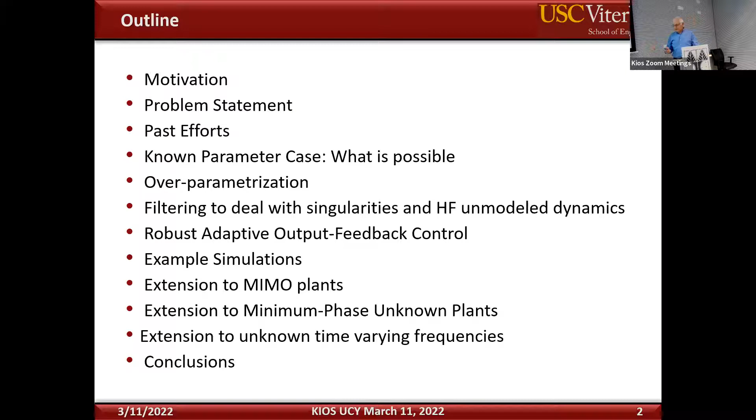Okay, so this is a list of topics I'm going to talk about. I might have to skip some. But let me give you first a review of the principle I'm talking about, which is a very simple thing.

Let's assume we have a signal which is a sinusoid, with amplitude A, frequency omega, and phi is the phase. What we call the internal model of the signal is the polynomial S squared plus omega squared, where S is the differential operator. In other words, when you operate, S takes the derivative, S squared takes the second derivative. So we say that Q(S) is the internal model of this signal.

Because when we operate on it, S squared plus omega squared operating on the signal: S operates on A sine omega t, differentiates, gives A omega cos of something; you differentiate another time, and it gives you minus omega squared, which cancels with the other term, giving you zero. In other words, when this polynomial operates on the sinusoid, it rejects it, no matter what the amplitude or phase is, as long as you know the frequency.

So let's assume now that we have a system which has a transfer function, Y equal G of S U, and we put as an input U A sine omega t plus phi. For people who know about Bode plots, this is how you get the Bode - you vary omega and do a couple of plots. When G of S operates on that, what it gets as output at steady state is the magnitude of that transfer function, where S is replaced with J omega, and omega is the frequency of the signal. Then at the end you have A sine omega t plus psi, where psi is the phase shift from G.

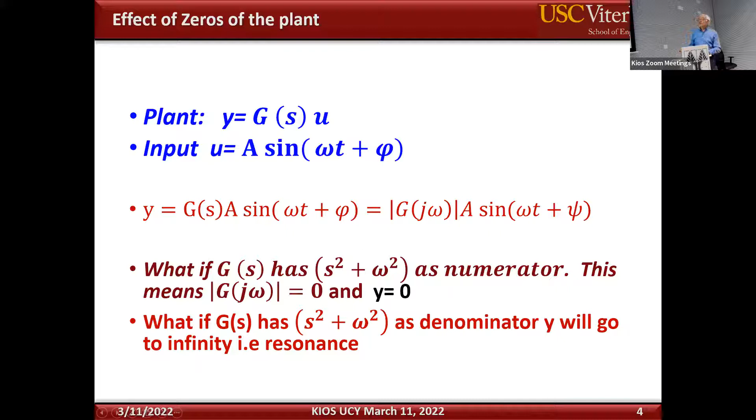But if G or G of S has a denominator S squared plus omega squared, obviously Y will go to infinity. This is what we call the resonance.

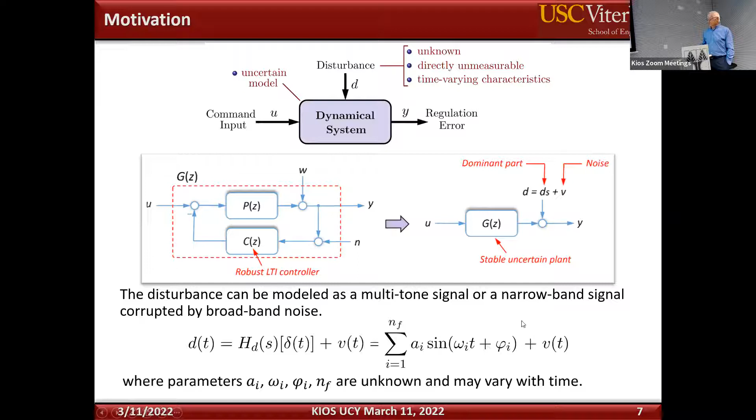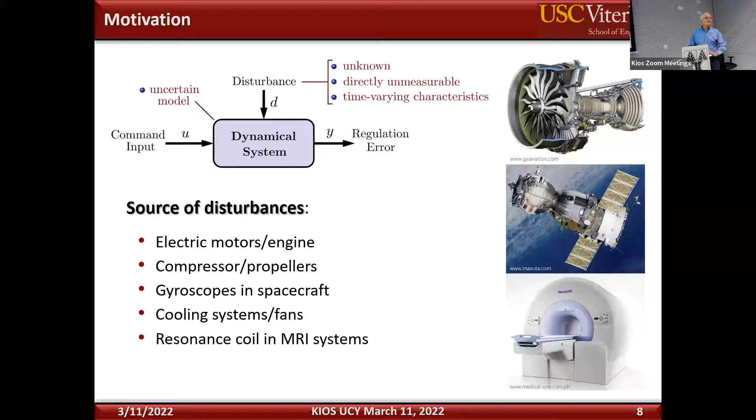So this has a lot of applications. Every application where things are moving and vibrating, that's where this theory would apply. I put quite a few here, from lasers. The way I got into this area is because a company asked me to solve the problem of jitter in a laser beam device.

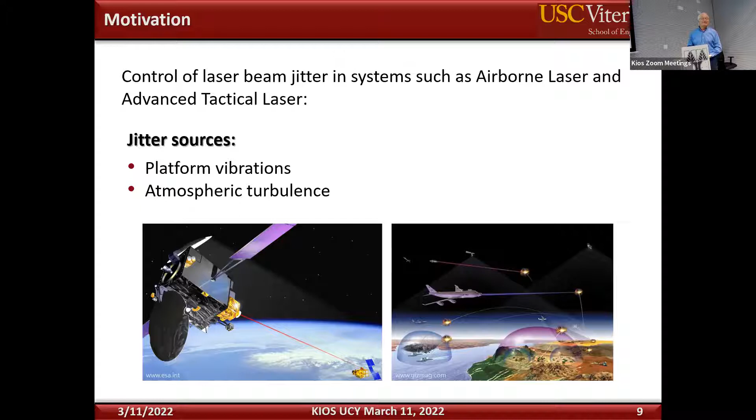And there are all kinds of noise cancellation gadgets in industry, on the plane, you can wear them. They're all based on this internal model principle, one way or another.

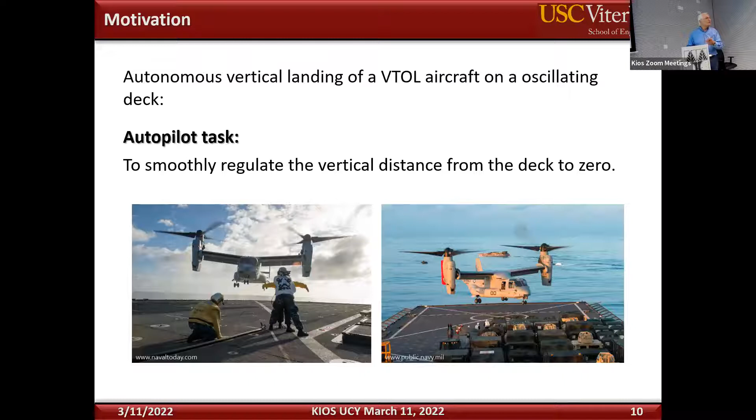So let's go to our problem. Our problem is to design some feedback here. We're just going to learn the frequencies, because remember, if we know the frequencies, we can kill them. So the idea here is to find some kind of parameterization to learn the frequencies and use the estimate of the frequencies in the internal model, with a similar controller as before, to achieve rejection of all the periodic terms without amplifying the broadband noise. That's really the problem.

So what we'd like to have is something like this. You can see the signal, the output here. It's all a mess, it has a lot of noise, a lot of periodic disturbances all mixed up. When we switch on the controller, we want to be left with just a low level of noise. You'll see this picture several times in the talk.

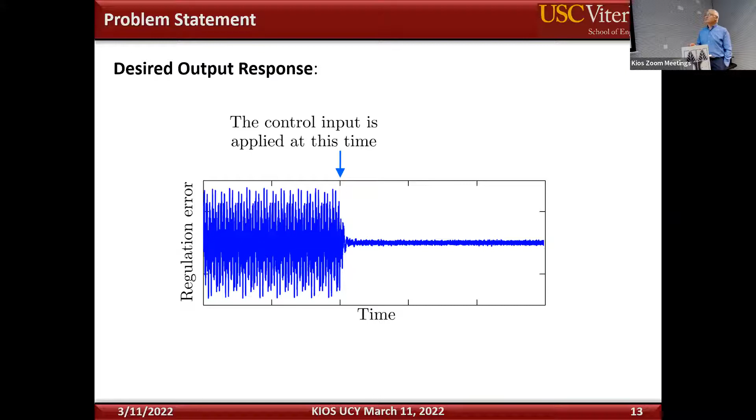An internal model, how do you put it in the feedback, and how do you estimate the frequencies? Some people do state space, some do input-output, some just figure out through simulations that it works, like this lattice filter implementation. When I looked into this area, I saw a lot of inconsistencies, method versus method, but they're all the same. How do you unite all these things? How do you put them together so it makes sense?

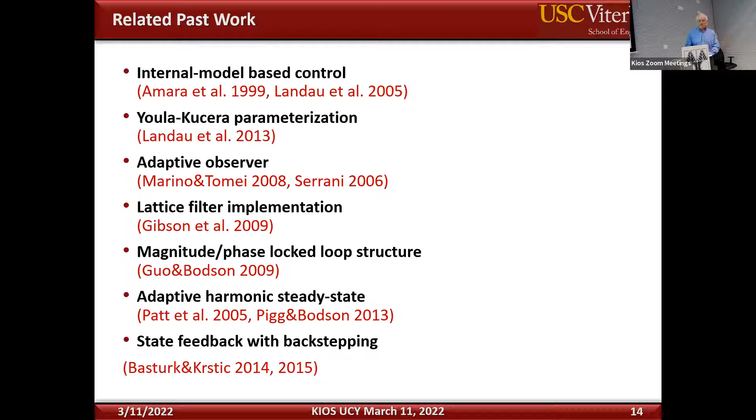So the common characteristic of this effort is that they use the internal model principle directly or indirectly. They abstract the controller structure. They have ways to estimate the frequencies. And the interesting thing from the estimation point of view is that if you model everything exactly, because you're dealing with periodic signals, you have what is called persistence of excitation. In other words, your output data contains all the information about the frequency, so the estimation becomes easy.

You can easily estimate. The problem, though, that is missing from that puzzle is that if you do that, you don't have any flexibility to play to avoid amplification of the noise. So what happens in a lot of these methods is that they reject the periodic disturbances and they amplify the noise.

So the group of Landau had a competition before, I didn't know because I just went into this area. And they had an experimental facility.

I will show the picture later on. So 8 groups participated. They sent their algorithms, they tested them, and Landau's algorithm became number 1. It was better than anyone else.

Then we published a paper in a Mediterranean Conference in Crete, and his students saw our algorithm there. He went back, put it on the system, and it beat their algorithm. So they called me asking how did you do it, what did you do, and so on. That's what I'm going to explain. Then we wrote a few papers together.

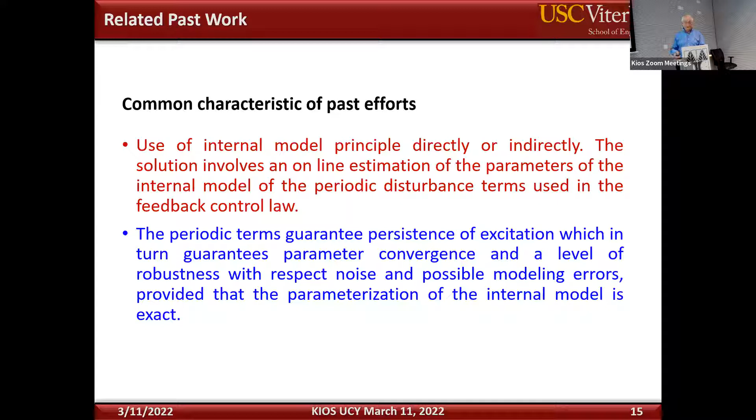So everybody, in order to prove something, has to assume that everything is exact, and of course they didn't bother about the noise, which is the main issue. I will show you samples here.

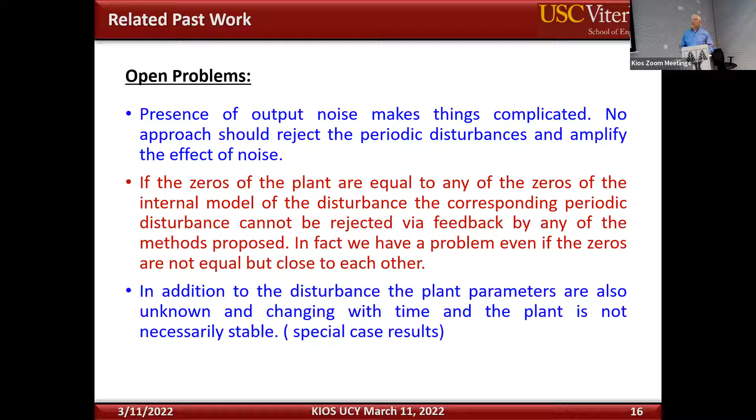So some of the open problems involve the noise: what if the zeros of the plant are not the same as the internal model, but they are close? That brings the gain of the system very low, and it has problems with adaptation. Then there's the question of what if the plant parameters are also unknown or have uncertainty. We address all these problems in this body of work.

It generates something, but it's multiplied with other things that we show, and it creates an anti-disturbance, a minus d term, that cancels with the disturbance d. So on a higher level, this is the mechanism: you have a U that generates oscillations, goes through the transfer function, and boils down to create something like minus d, which then completely kills the disturbance.

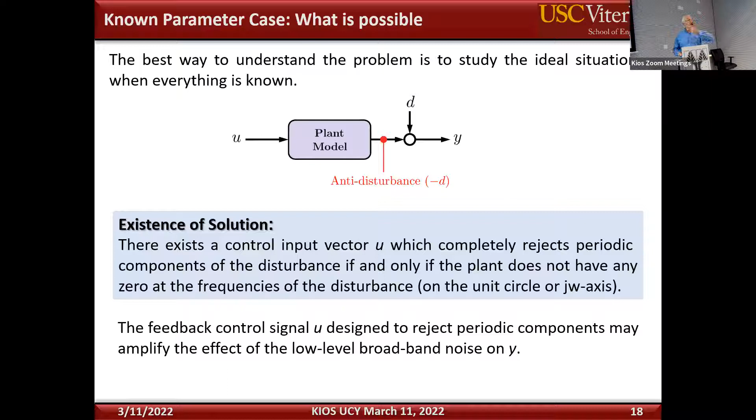So the necessary and sufficient condition to be able to do that is that the plant must allow these frequencies to go through. This means the zeros of the plant should not be located at the frequencies of the disturbance. Otherwise, the signal will not go through to create this minus d term.

So eventually, our controller structure is like this. Here is the plant, the real system. There is plant uncertainty here because we can never know the real system exactly. So we assume G of 0, I put Q here, it could be discrete or continuous. We assume we know the dominant part of the plant, the transfer function G of 0, and we use it here to generate a signal which we subtract from Y.

What you get here is the estimate of d. You do the calculations, and what you get is the estimate of d, assuming the uncertainty is equal to 0. Because the uncertainty is not equal to 0, you get something more.

Then it goes to this filter, which has theta that we want to adapt to estimate, and a filter Q, which I'll show you how we use it, to shape G of 0 in the frequency domain. If you do that, the output of the plant can be expressed as 1 minus G of 0.

Minus G of 0, Fk, times something inverse. I'm using not just single input single output, it could be multivariable, driven by D. So the term 1 plus delta m G of 0 F of K inverse is underneath, and it has to be stable for stability. The one on top, you can see here, is the one that will make the effect of the disturbance zero.

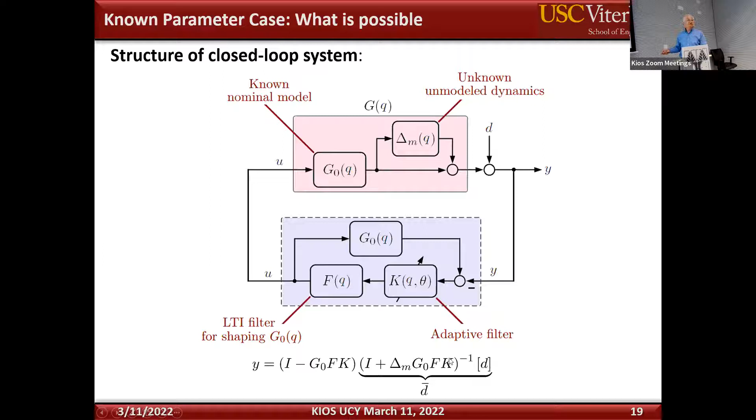Here is the structure of these filters. As I said before, we choose some order n which is greater than twice the number of frequencies. The first thing we want to know is does this structure have a solution? In other words, will you be able to find this filter K of theta, which boils down to this parameter theta, or the vector theta, if we fix everything else.

What is the problem with that? If we write down the system, for stability you want this term with a multiplicative perturbation to be less than 1. This transfer function is always stable because the roots, the poles of the closed loop transfer function, are the roots of this polynomial, and the poles of this one are stable because G of 0 is stable and K has stable poles. But this one may not be stable unless delta is small, and this condition comes from the Nyquist criteria.

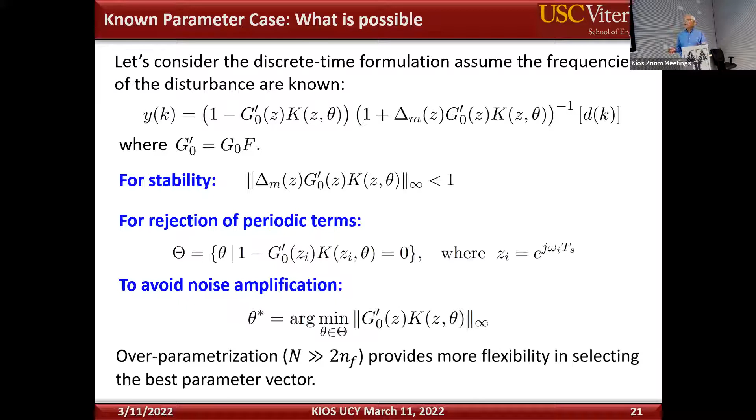So whatever you get as a sensitivity function for the noise is given—you cannot change it. But if you over-parameterize, then you have an infinite number of theta stars, and you choose the one that minimizes this noise. It means it brings the gain of the function that multiplies the noise to less than or equal to 1.

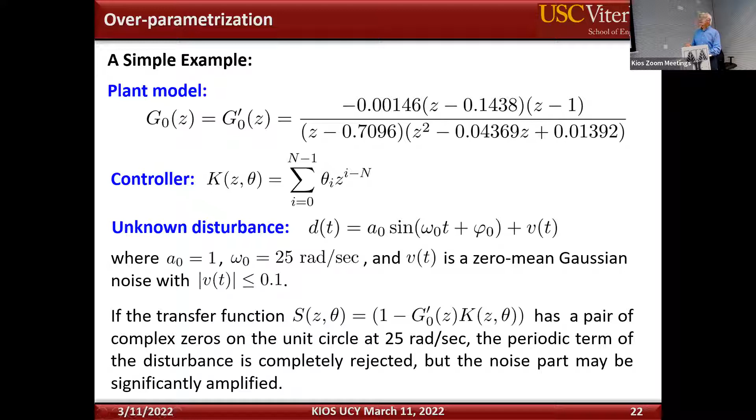Here is an example, just to get an idea, of a third order system. We model it as a third order system. There is one frequency and noise, which is Gaussian with amplitude less than 0.1. If this term has a pair of complex zeros at the same frequencies, then the periodic terms will be completely rejected, as we talked before. Here is the problem that I mentioned with the noise.

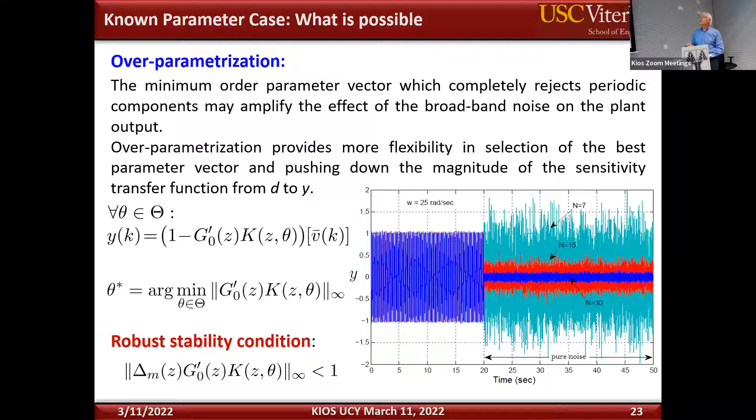If we make it n equal 30, we get what we like to have—no noise amplification at all. You have to keep in mind that feedback cannot do anything to noise because it's broadband noise. The bandwidth of the controller is narrow band, so it doesn't get into the high frequency region. So the only thing in control you are trying to do is not amplify it. You can see here that if we don't pay attention, we can amplify it, and that defeats the purpose of the whole approach.

So here's how it works when n is equal to this. This is the sensitivity transfer function. You can see here at the frequency of 25 how the gain went down considerably, right? This is the gain of this function here. It's almost zero at the frequency of the disturbance. And away from that, you can see if n is equal to 7, this is greater than 0 in the logarithmic scale, which means it's greater than 1. And this is what we see.

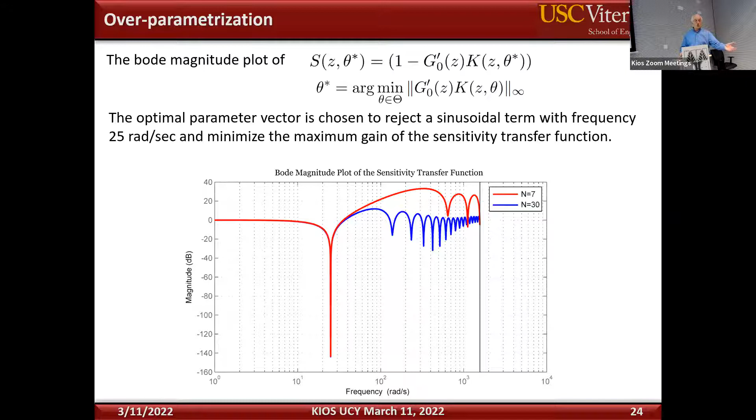But for n is equal to 30, this sensitivity function, which is this one here, is very close to or approximately equal to 1. And that's why—so what you saw in the time domain, I show it to you in the frequency domain too.

So the way we estimate these parameters of the internal model, we get all these parameterizations. There are some least squares type recursive algorithms to estimate the parameters—basically it's estimating all these theta star terms that were in the feedback loop.

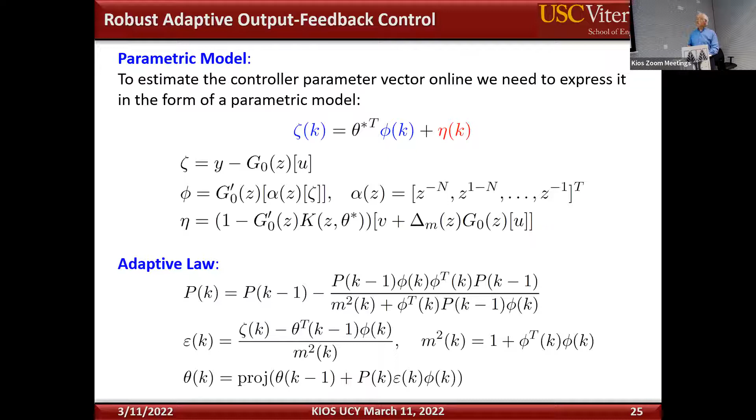And we ended up with something that is like an adaptive filter, right? And that's—but you work it out. Theory says everything will work out, but the theory doesn't tell you...

...when you go into practice, something that is greater than 0 makes a lot of difference. Theory says greater than 0, you're fine. But greater than 0, 10 to the minus 10 is greater than 0. Computationally, this is probably equal to 0, right? So we have to look at this from the practicality point of view.

So if the plant has a small gain at the frequency range of interest, that means all the signals will be scaled down. And if you are relying on the signals to drive your learning process, then it's not going to be a lot of energy. So the gain cannot be low.

Again, theory doesn't tell you that. If you put too much large gain, then you push the bandwidth of the controller and excite the unmodeled dynamics—you have problems with stability. So you have to have something, and in robust control it's called loop shaping, and people know that very well. It has to be something that gives you a high gain in the low frequency range, and it drops down rapidly in the high frequency range where you have noise and unmodeled dynamics.

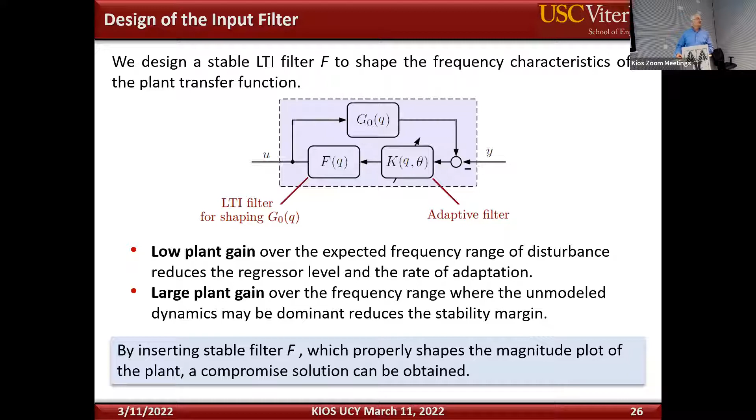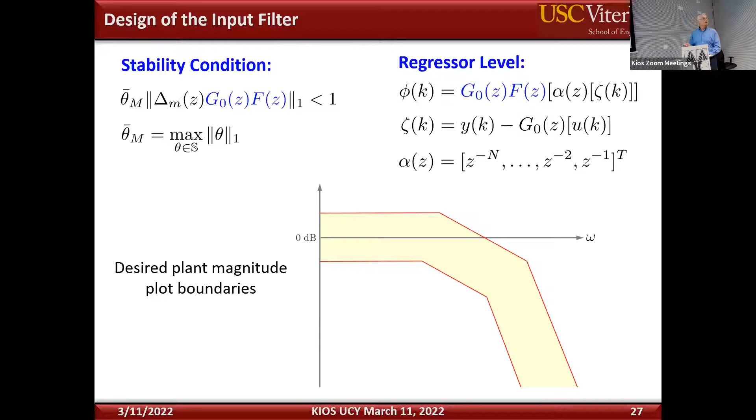So it's a combination of ideas from robust control and adaptive control. If you are a control engineer and you go into industry, 98% of the problems is about this stuff, not the adaptive stuff, but this loop shaping and the bandwidth and things like that. So this stuff is classical and it may not be interesting from the research point of view, but it's extremely useful in the control of real systems.

So if we put this together, what we designed, then we achieve the result—but because of adaptation and so on, the lack of persistent excitation in this case, we get that the mean square output depends on the size of the unmodeled dynamics and the size of the noise. That's what we get. The periodic disturbances are gone—they are totally rejected. And if there are no unmodeled dynamics and no noise, then you get exact convergence of the output to 0.

So because you can't get rid of the noise, at the end your output will be moving a little bit with the noise. But if in an ideal situation you remove the noise, then you go down to the exact result of y going to 0.

The same thing we can do in the continuous time case, as we did in discrete, continuous, multivariable—the same tools. With this work, we try to unify, because something you see in adaptive, someone does something in continuous, then another group does the same thing in discrete. It appears that the two are different, but they're not, because they use different symbols. People don't look at it carefully and think it's a different thing. One thing we try to do is make sure all these things are unified, so there's no confusion for young people entering the area—one dealing with discrete time systems, the other continuous.

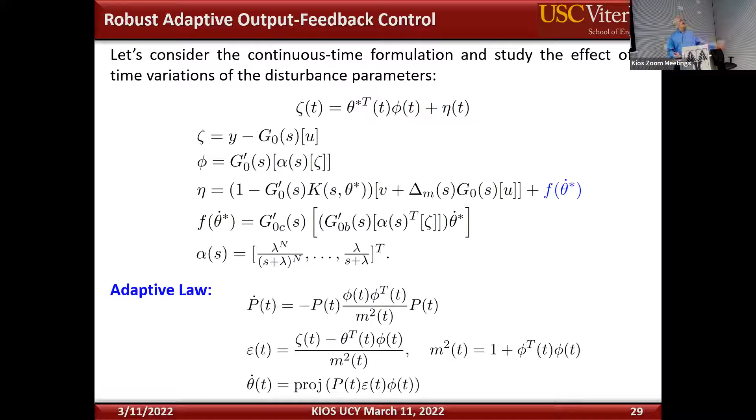With a simple Euler approximation formula, you go from one to another very easily. So the same result here.

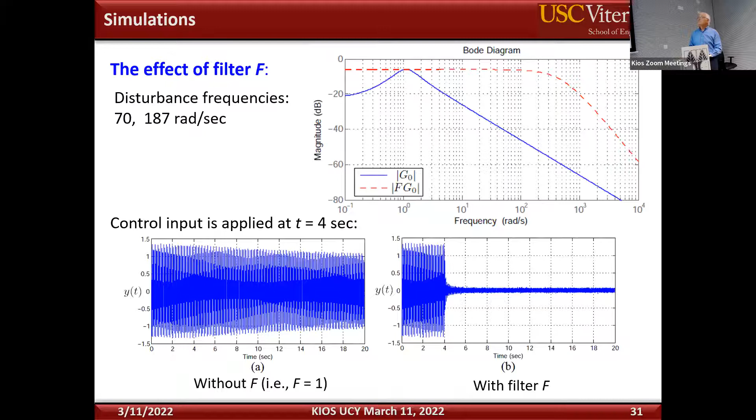Here the frequencies now change, because the whole motivation for the case of unknown frequencies was that the frequency may change. If the frequency is fixed, you run an FFT at the output, get the frequencies, set your Q, and you don't need adaptation. But the frequencies may change.

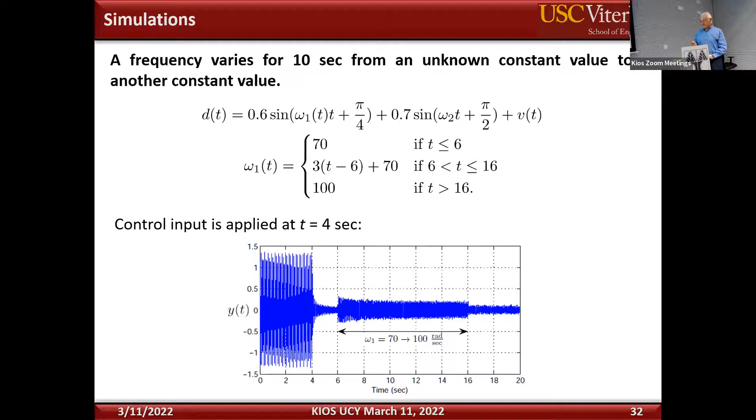We address that in a current paper. This is the case we're considering, motivated by this problem, where the frequencies are now time varying. You have alpha sub i of t, and the derivative of alpha of t is omega t, so alpha sub i of t is the integral of some function omega i. If alpha sub i dot equals a constant, then this becomes omega t, and you plug it in here.

Now the internal model here—the polynomial that operates on sine and rejects it—becomes a polynomial differential operator, but the coefficients are time varying, depending on omega and its derivative. So it's a more complicated case. We just wrote the paper and sent it for publication, but we found that in this case we can develop the internal model with these time varying coefficients.

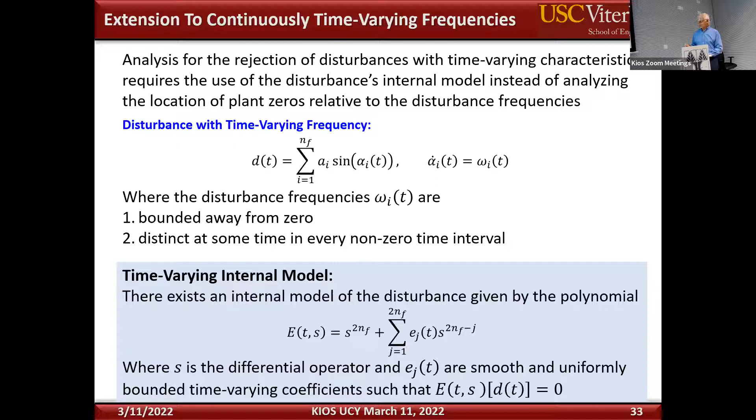So here is the same structure. Because theta is now time varying, the coefficients of the internal model are time varying, so we have to watch out for commutability. A constant you can bring in front of the differential operator or behind it, but if it's time varying and you put it in front, it gets differentiated, so it gets mixed up. How you parameterize the system becomes very important.

Here we have the same result, except for one difference: we still need coprimeness—we don't want the zeros of the plant to share any roots of the internal model. We can reject the periodic disturbances, but not exactly, unless the plant is minimum phase. If the plant is minimum phase, then rejection of these time varying disturbances becomes exact. That was an interesting result, because we don't have this problem in the case where disturbances have fixed frequencies.

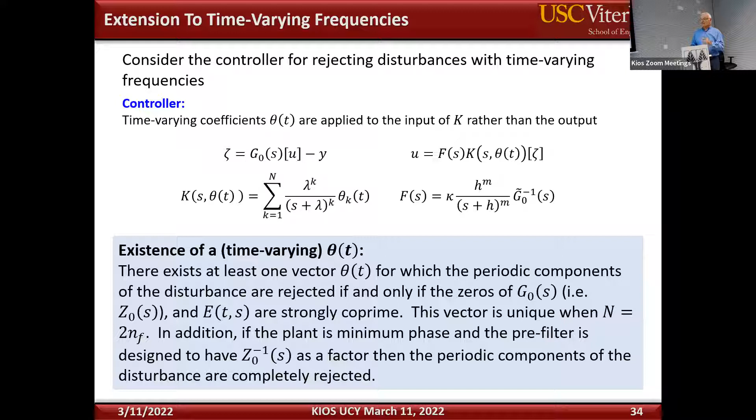So this minimum phase, for people who may not be familiar, means the zeros of the plant are stable, within the unit circle or the left side of the S-plane.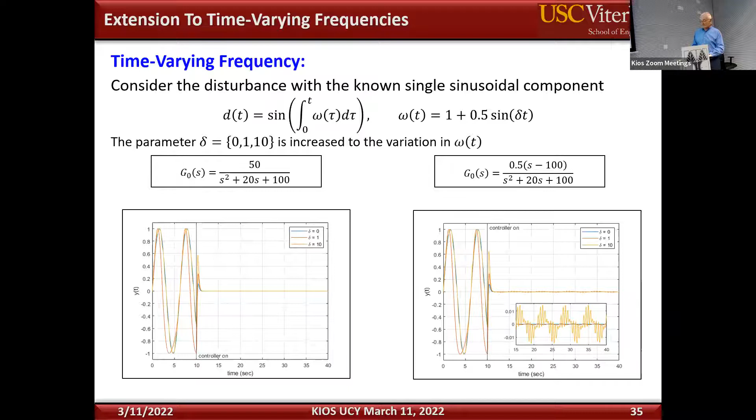So this is the control in this time varying case. And we repeated the example that I gave you before with this e to the -3t term. And you can see here that we got a much better result than before.

And here is another example, the exact same example. Remember that in the middle here, when you are at this region from 20 to 30, the amplitude was very high, a little bit higher than the other. You can see in the time varying case, because we changed the algorithm to account for time variations, we are able to show this is not affected by the change of the disturbance at all, of the frequency at all.

So then we can extend this to the multivariable case, where now we have to deal with the zeros of the plant, the transmission zeros. The zero of the plant is the value of S that makes the output equal to zero, right? When you go to the multivariable case, you have a matrix now. So what does that mean? Well, you can make all the elements equal to zero, and that would be a zero, but here the zeros become the rank of the matrix.

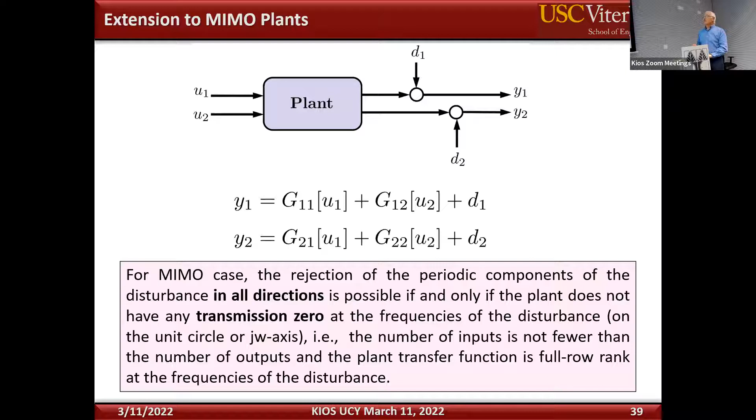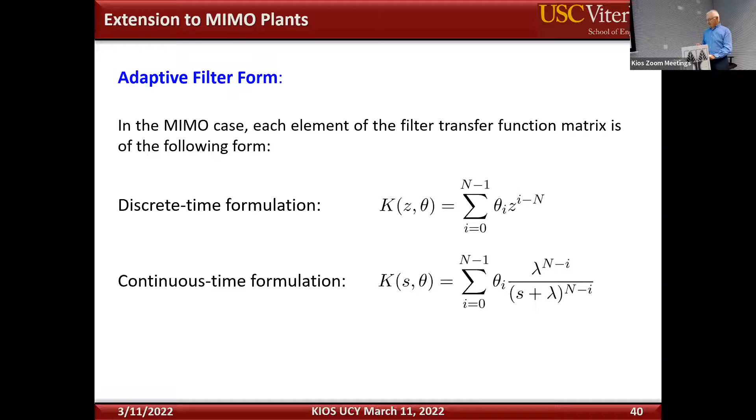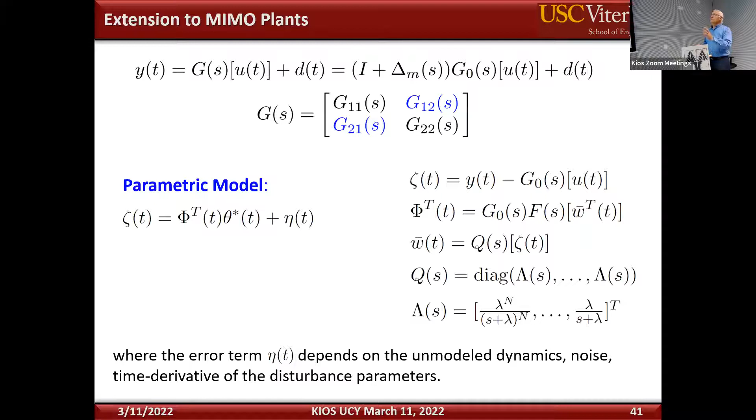And again, all the parameterizations, the formulations just become vectors instead of scalars. And again, the parameterization, instead of zeta being a scalar, it's a vector, and so on. So nothing different, matrix theory, nothing different from the single input, single output.

And again, the estimation scheme and the results are now of similar nature. There's no term here that depends on the disturbance, just the noise, the level of the noise, and the uncertainty in the model dynamics.

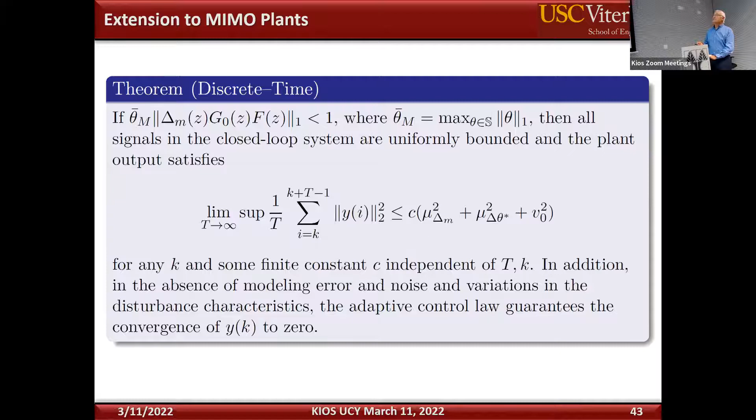So this is one of the examples. Probably examples are more easy to see. We have two channels which have different frequencies, right? And these are periodic disturbance terms that you don't know. They are there, they're periodic, but you don't know them, and they could change with time. And at 25 seconds, they even change frequencies, they become something else.

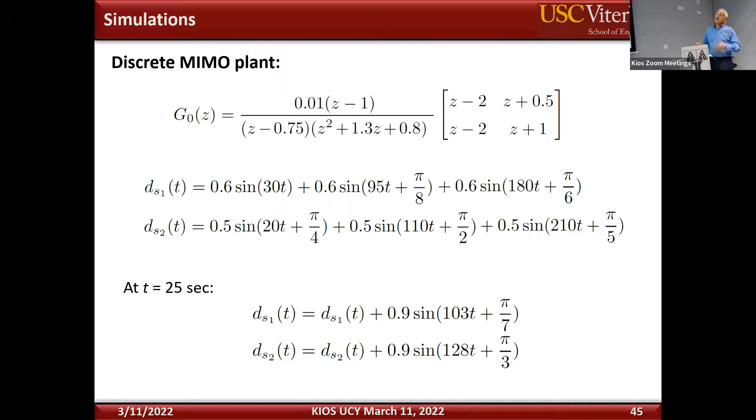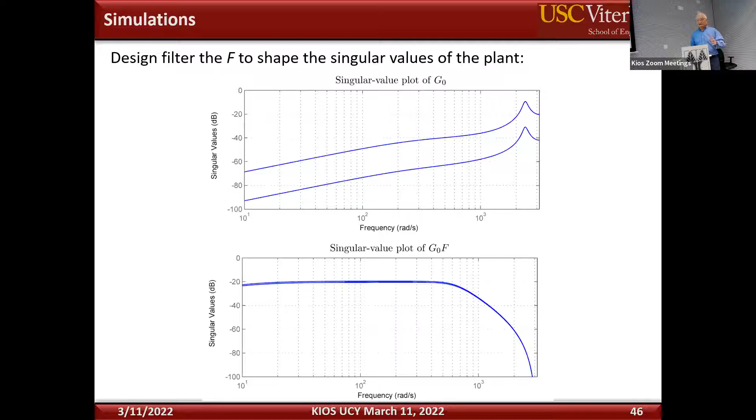And you can see here the shaping of the singular values is equivalent to the case of single input, single output. And here is the case where we don't do anything with the filter. So theoretically, it should work, right? But taking into account practical considerations, no, because the gain of the transfer function is very low in this case.

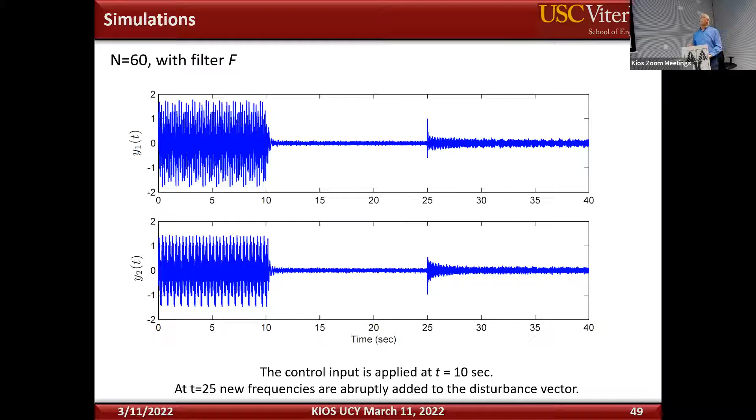And here when we increase the filter, we do more over-parameterization, and we improve performance even better.

Now we do something crazy: we don't know the frequencies, how many there are. So we do these chirp disturbances that have many frequencies, all concentrated in this region here. And we want to see how the controller does.

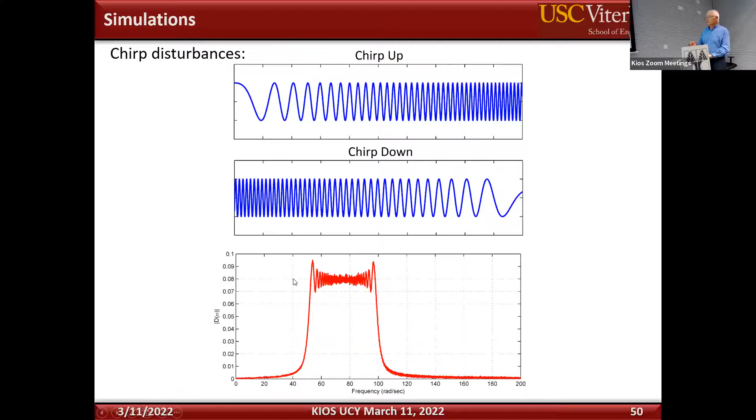So this is the system that Landau has, which is a mechanical system that creates an oscillating shaft, and they apply the control. This is a real system in the lab, in the shaker. I haven't seen it, but picture it. We used to send algorithms there to test them on this system and confirm whether we get a simulation match.

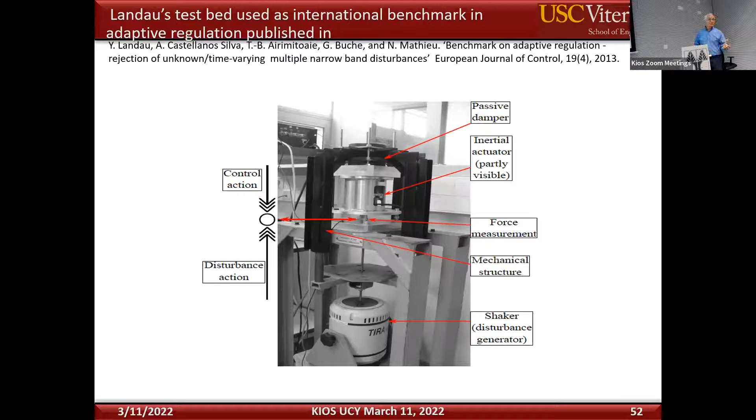So apparently they have some flexibility to change, to make it from single input to multivariable, to put time-varying frequencies, and so on.

So, and then we remember we talk about this unknown plant. One thing that everybody assumes is that the plant model, which is the G of 0, is known exactly. So we decided, okay, what if we don't know that plant for sure?

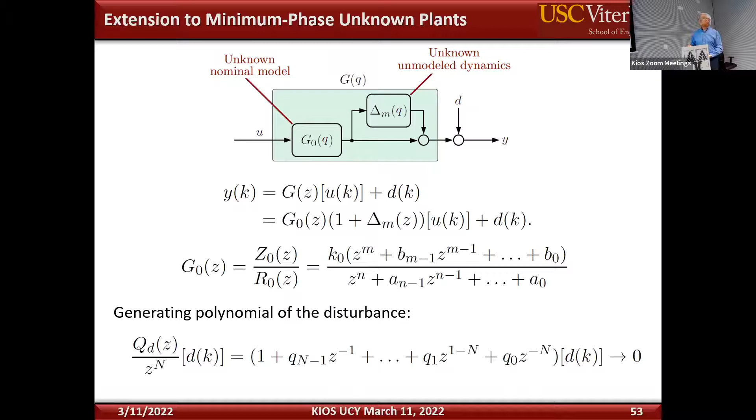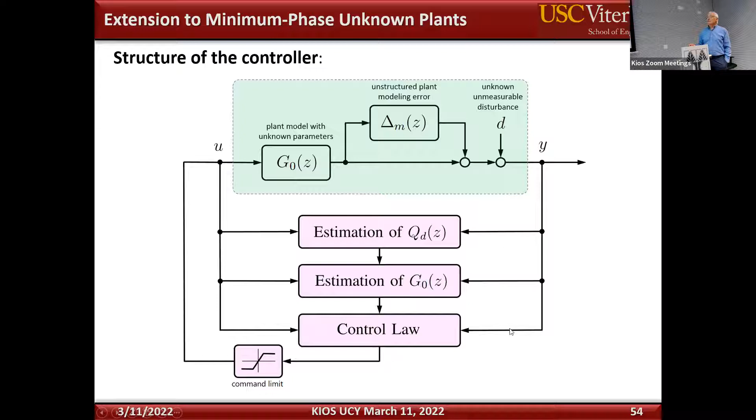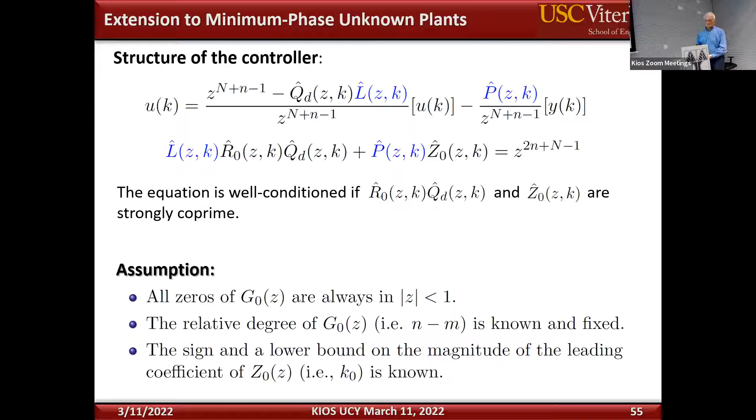And this has two levels of estimation: one that involves the estimation of the internal model of the disturbance, and another, the estimation of the plant parameters. Then it goes through the control law, and it becomes similar to what we have in model reference adaptive control. I don't want to get into all these details, but...

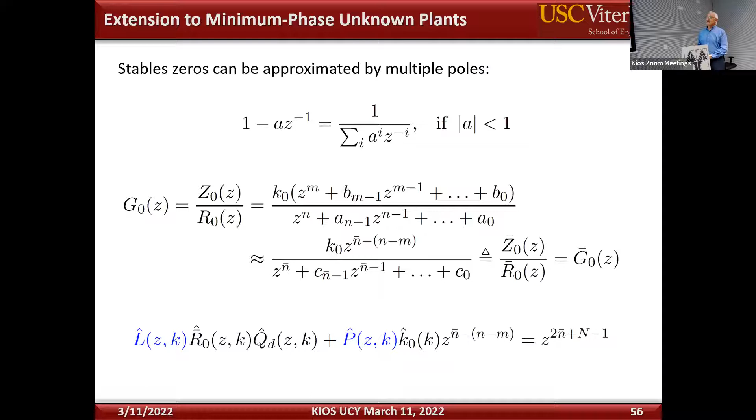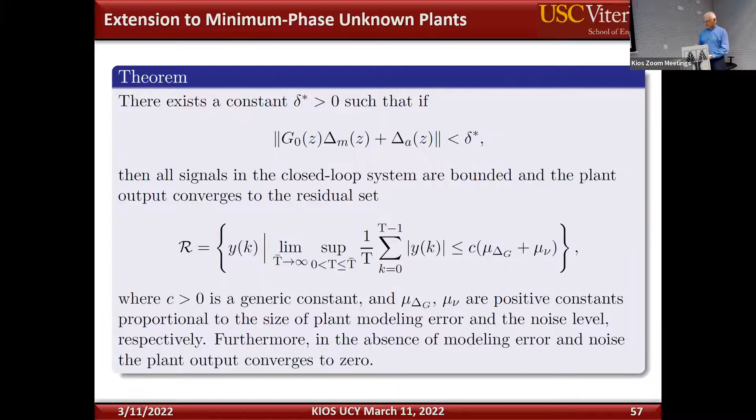The main assumption here, which is actually restrictive, is that the zeros of the plant are stable. And we get a similar result here, that the mean square error is of the order of the uncertainty and the noise. Here are some of the results that we apply to an unknown plant.

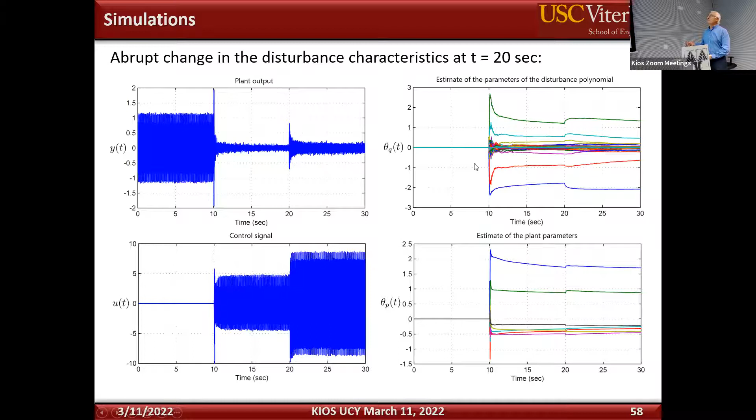So the two work together. Here is another case, and what happens here is we switch abruptly to a completely different frequency. You can see the jump here generates signals, so it can estimate, but the system catches up pretty fast.

So the open problems in this area: if we now have unknown plants which are not necessarily minimum phase, and they're also time-varying, how do you do it? Apparently the problem in that case becomes a parameterization problem, which Marios knows very well. The parameters cannot be expressed linearly in a parametric model, so we cannot have a good estimation algorithm.

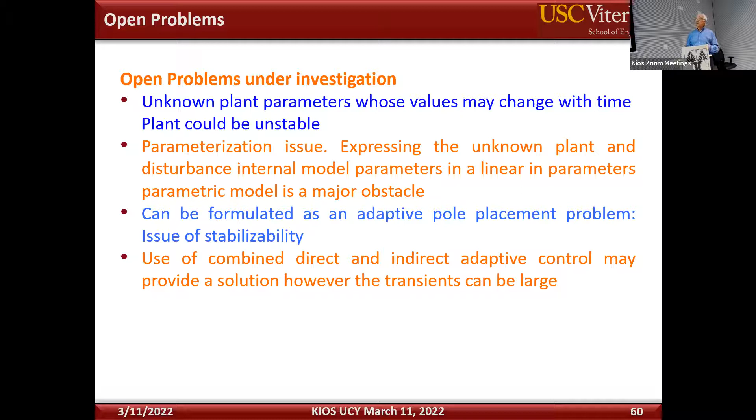And in this case it becomes similar to the problem of direct and indirect adaptive control, where you're trying to avoid this problem of stabilizability, which has to do with the estimated plant being controllable and observable at each time t.

So the conclusion of this work is that the first thing I really learned and appreciate—and a student who works on this for a company in aerospace is doing extremely well because he learned that stuff so well—is this loop shaping and the interaction with adaptation, and that's what they really need in industry.

Most of our students don't know that because we get excited with research topics and teach them nonlinear control and this and that, and very little attention is put into the fundamentals. You can theoretically prove things, but if you don't think practically and so on, what you develop may not work, and you may not know why. That's the worst scenario.

So we combine this engineering intuition, the advanced theory and stability, and some basic common sense which comes from this loop shaping and robust control, to create a system that is practical, and yet it guarantees all the analytical conditions for stability and robustness, and it's being implemented on a real system.

Actually, it's implemented by also the Air Force on a platform with laser beams, and we don't know what they got because it became all confidential after they got the algorithm.

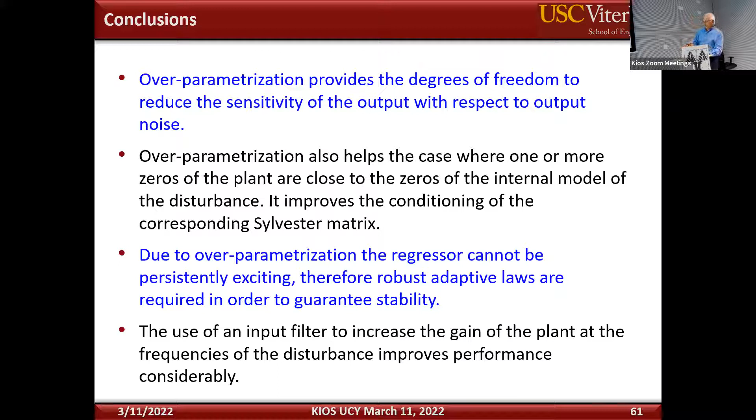So, am I going backwards now or forward? Okay.

With this, I'd like to stop here and thank you very much for your attention. I don't expect you to follow all the equations I have, but I hope I convinced you that there is a way to get rid of sinusoids if they appear at the end of any system. There are techniques to do it, and this is one of them. Thank you.

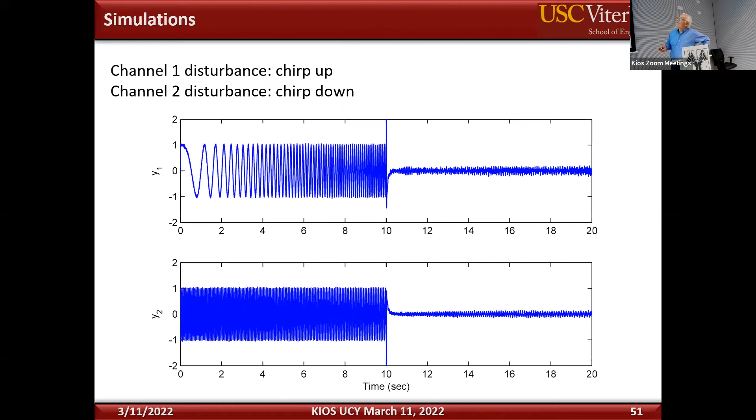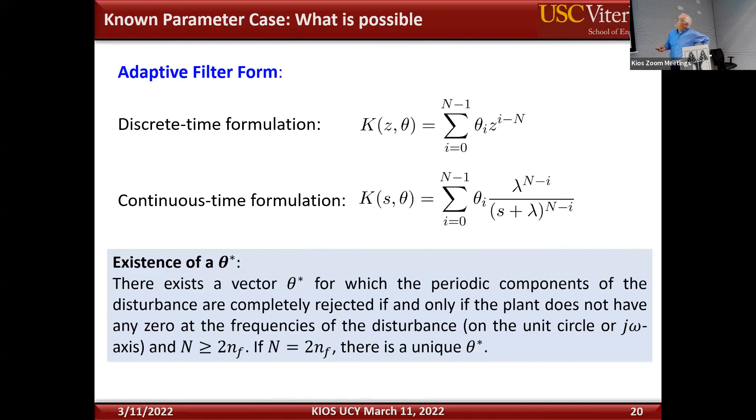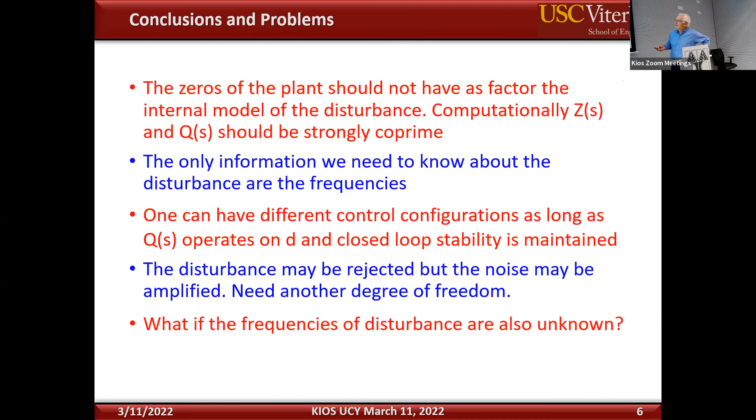This time, slide 5 now. Petros, we have to leave it. There's another - yeah, group, okay. Shall I answer them? Yeah. Number 5. Okay, what was the question? You said that the trick produces a signal that is driven by noise. Could the signal be used as an estimator of the noise signal and fed back to the expression?

Yeah, okay, that's a good question. You cannot estimate the noise. The noise, assuming there is randomness - what is that estimate? But you could estimate the frequency here. You could have a parameter estimator to estimate - not estimate omega, but to estimate the amplitude and the phase. There is a way to do it. You want to estimate A and the phase from that configuration, yes, but not the noise. The noise is assumed stochastic - something that changes, maybe not exactly white noise, but something that rolls, that doesn't repeat itself. It has no pattern, it changes very fast, small amplitude but fast frequencies. A lot of frequencies together, but with a very low amplitude, which makes it difficult to take them out, and high frequency too.

Okay. But we need to leave the room because there's another reservation in 5 minutes.